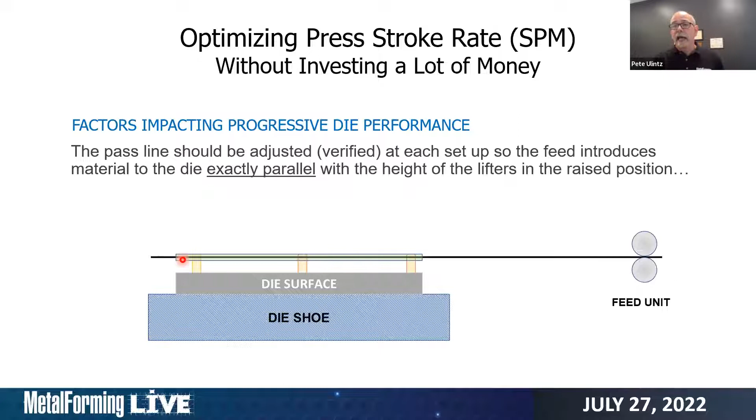In general, I would say that our pass line should be adjusted and verified with each setup so that the feed, the material coming from the feed, introduces the material exactly parallel with the height of the lifters in our die. So if we've got a die that has any lift where we're lifting the strip, I suggest that the raised position of our lifters is what the feed line should be. This makes sense because we want no obstruction in our feed. If we have our feed units set lower, we're feeding uphill and then changing direction to continue feeding into the die. This change in direction is what's going to give us problems.

Now for dies that have little or no lift, such as a lot of high-speed applications, what we would be looking at is we want to make sure the die surface and any feed bridge or extension that we have are all on the same surface. A lot of times in high-speed applications, to set the feed line, what we'll do is we'll actually get in there with an indicator, indicate the die surface, indicate the feed bridge. If there's a feed shelf coming off from the feeder, what is that height?

All of this should all be in line, because especially for very thin materials running at high speeds, any change of direction is going to pose an opportunity for the material to bend, buckle. We're going to have short feeds, missed feeds, things of that nature. So in my opinion, this is very important.

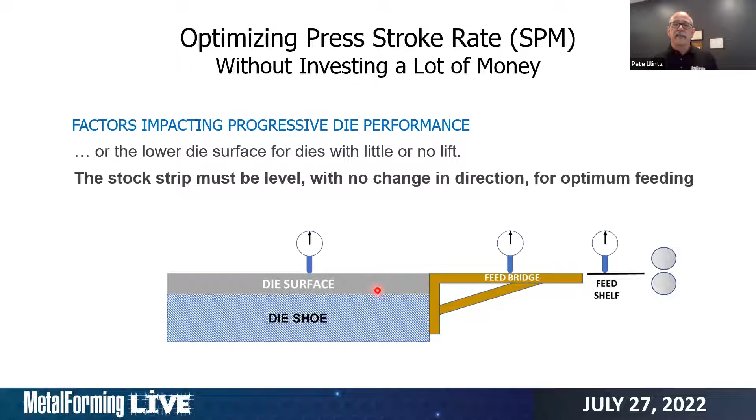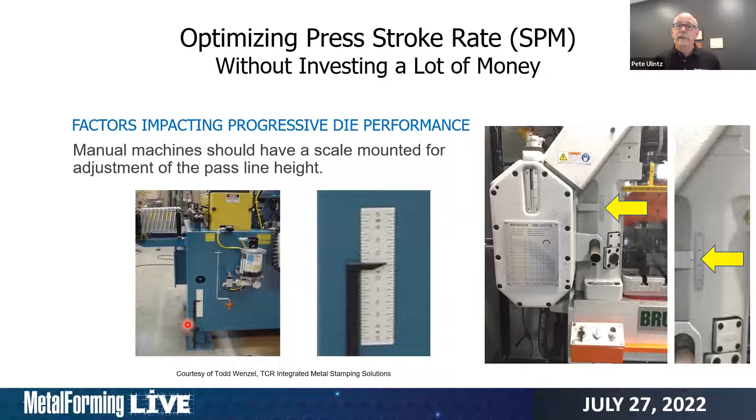Now, this particular customer took a scale, epoxied it to the side of the machine, and made a little pointer. So if the setup required that the feed be raised 10 millimeters or lowered 8 millimeters, they can get an exact measurement off of the scale and have much more accurate settings. On the right here, we see there's a scale mounting. Some of the press manufacturers include that with their press. So we can see how it works in this application with the Bruderer press.

I cannot tell you how many times I've seen stacks of wooden pallets or plastic parts containers turned upside down to support the stock strip. Think about your stamping operation.

You've got a multi-million-dollar press line with a die in there that probably costs more than most of our homes, and we take fifteen dollars worth of pallets and throw it underneath the material to help keep it level in the die. It just doesn't make sense.

So use or make some type of a coil bridge. One of the important things to notice is that these coil bridges generally have rollers on them, so we want to minimize the amount of friction, because when we're feeding, friction is going to be our enemy essentially.

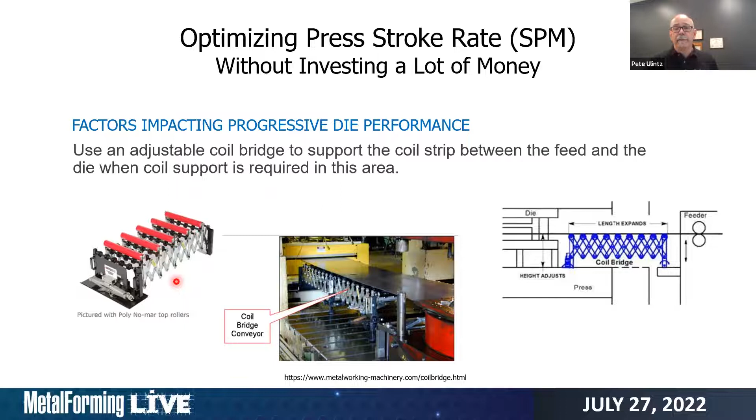Right, we want a smooth feeding without any resistance. So if we're feeding across wooden pallets or other types of containers turned upside down, that's one of our variables that we can't control. What is the friction there? Is that causing our feed rolls to slip? Is it causing a late signal for the material to reach the end of the die, for the signal to go to the press controller to say whether or not the feed made its pitch before cycling through the next operation? Very important.

The other thing that's important is the feed angle. So when we talk about feed angle, what is it? In a nutshell, it's the amount of time we have to feed the material from the time the press opened, the die opened, the pilots have pulled out of the strip, parts have fallen out of the die, they're clear, cams are back. This is what we refer to as a clear path.

Sometimes mistakes are made. We're looking just when the pilot disengages to begin our feed, but we also have to consider are our cams back, have parts ejected properly. This clear path may entail more than making sure the pilots are out of the strip. And then we want to feed the material.

On older feeds, back in the day, typically we fed from 270 degrees to 90 degrees. It was relatively fixed; there wasn't much we could do to alter it. With our mechanical feeds, with the air feeds, we were able to put relays on them, rotary relay switches, and maybe expand the feed angle from maybe 250 degrees to 120 degrees. So we were able to increase this feed angle, which is important.

The larger this feed angle is, the more time we have to feed. The more time we have to feed means we can move the material slower to make sure it doesn't slip, that the progressions are accurate.

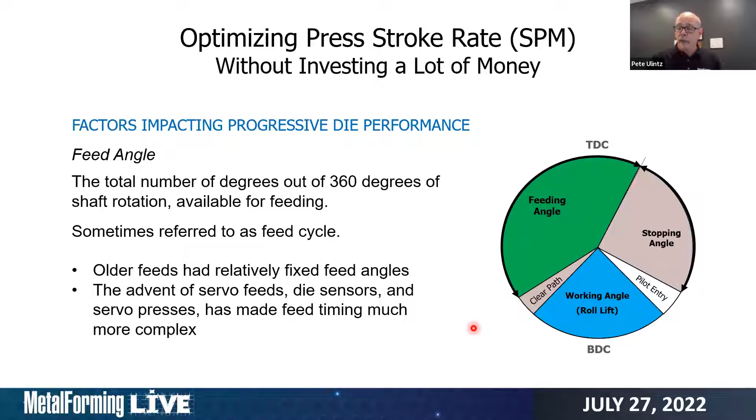And the reason we want to run as slow as possible is, one, it increases accuracy. Two, we reduce the potential for the feed rolls to slip. If we've got some really rapid acceleration, we can get some slippage. We have better loop stability, we don't have the loop dancing around uncontrollably, and that reduces the probability of buckles and die jams.

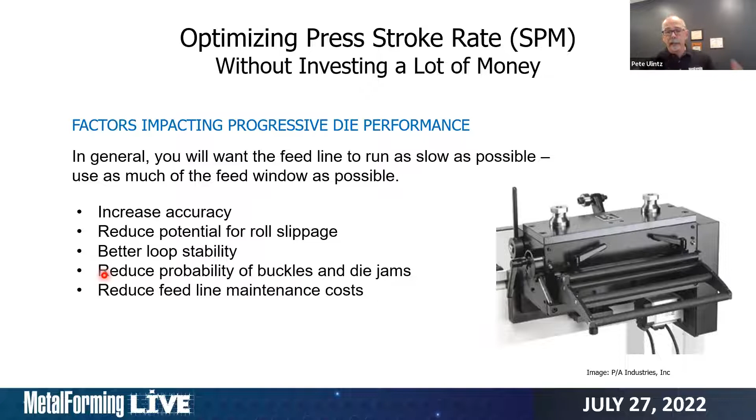And when we slow down our feeds and slow down our processes, it's this right here that we're usually dealing with. We're going to slow things down because we're getting buckles and die jams. And when I say slow things down, we're going to slow the press down, because the press is tied to the feed. If I slow the press down, I slow down the feed, and these problems go away.

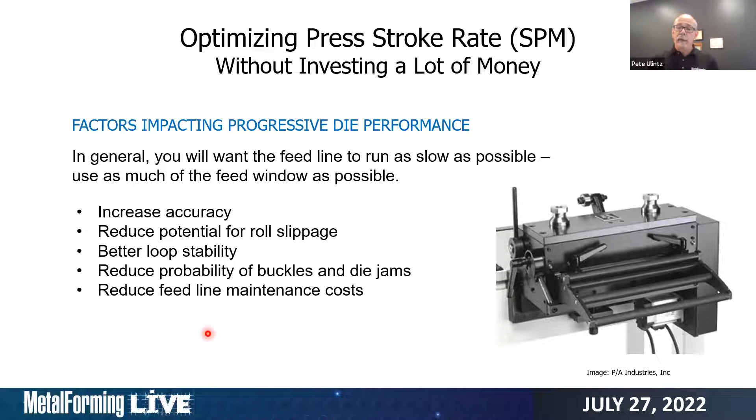But what I'm suggesting is we need a way to maintain press speed while still finding a way to reduce the feed speed, and this is what we're going to be talking about here. It also reduces feed line maintenance costs, because we're not rapidly accelerating and decelerating the materials we're trying to feed through the dies.

So coming back to the angles we talked about, when it comes to die protection, one of the things that's really important is this concept of a critical angle. We have to know what the critical angle is for our process.

The critical angle is the last degree of rotation or angle that a fault can be initiated so that the press will stop before it closes on the strip. This is affected by press speed, the slide and die weight, the counterbalance pressure, the condition of the clutch, and where in the stroke the signal is initiated.

In the stroke, our slide velocities are not constant. At 270 and 90 degrees of rotation, our slide velocities are actually at their greatest, moving at their maximum speed. It's going to take longer to stop the press, as opposed to if a signal was stopped near the top of the stroke, where the slide is beginning to come to a stop, so it can change direction and continue to close the die.

So this critical angle, how do we determine this? One way is to inch the press down and observe when the pilot, the tip of the pilot, not the locating body diameter, the tip of the pilot, is in the material. We can open the feed roll, because if the strip were to shift one direction or the other, the tip of the pilot is in there to pick up the hole and help position it.

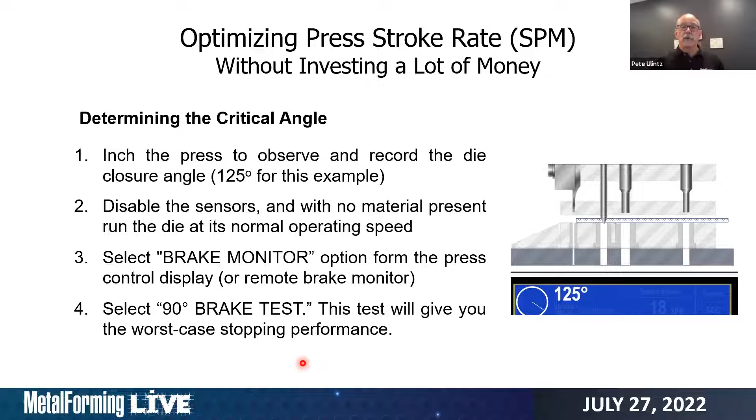Then we're going to select the brake monitor option from your press control, or if you're using a remote brake monitor, you select that option from the remote brake monitor, and you're going to select the 90-degree brake test. The 90-degree test, if we test at 90 degrees, that's the fastest that the slide is moving. That'll give us a worst case stopping performance.

After the press stops, we'll record that angle. In this instance here, we can see the stop angle is 96 degrees. Let's subtract that from the die closure angle, which was 125. The result is 29 degrees. So here's my critical angle, 29 degrees.

This critical angle will change with press speed, because the faster the press is going, the longer it's going to take for the press to stop, for the brake to stop the press. Then we want to document that.

So here is a sensor window setup sheet, and we've got a number of different sensors here. What type of sensor? Is it a top stop? Is it an e-stop? When does it come on? When does it turn off?

It's also important, in my opinion, to create some details or notes. What are you trying to accomplish here? We're in this short feed, we're using a small window to decrease feed-related incidences. On the cam return, we're going to use a small window so the cam does not interfere with the feeding. On material buckle, we'll use the whole sensor window that we have available.

Other related events that I think we should include is, what is the critical angle? And what is the must stop angle for that die? So now we know what the must stop angle is, we know what the critical angle is. How did we determine it? We used a 90-degree brake test. Document that. How did we determine what the must stop angle is? We did it by checking the die closure angle.

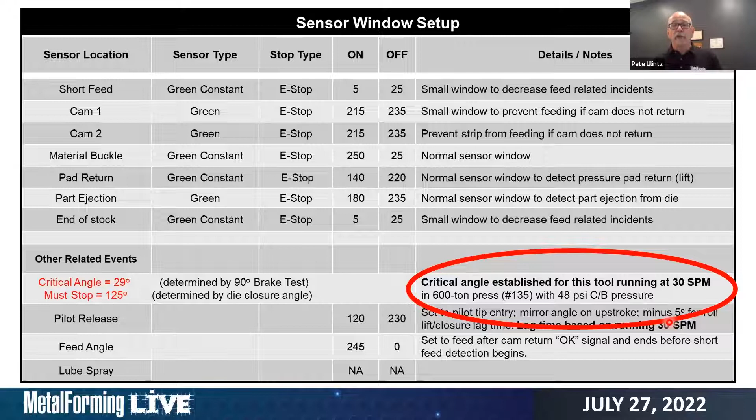Well, all of them are in different states of maintenance. The brake might be worn on one press compared to another that just had a rebuild, so one press has a longer stopping time than the other. Also, what was the counterbalance pressure that was used? Changing the counterbalance pressure will affect the stopping angle.

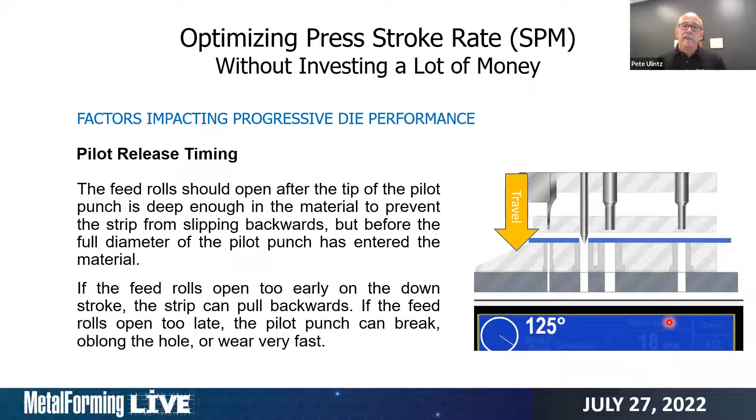What I see a lot of times is, regardless of the die, a lot of press operators and die setters will set the pilot release to close when we're at the bottom of the stroke. The thinking is that I've got the material constrained, the pressure pad and the stripper are holding it, it's been located, it can't move. This is an opportune time to close the feed rolls.

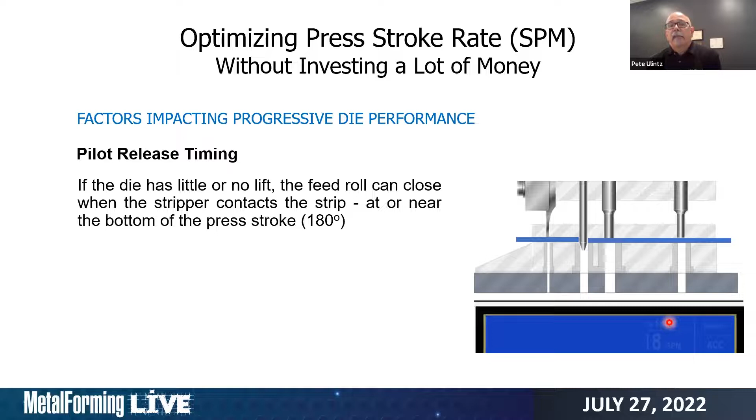But that's a bad decision if the die has some lift. If the die has lift, the feed roll should close when the lifters have come to the full up position, or close them at the last possible minute.

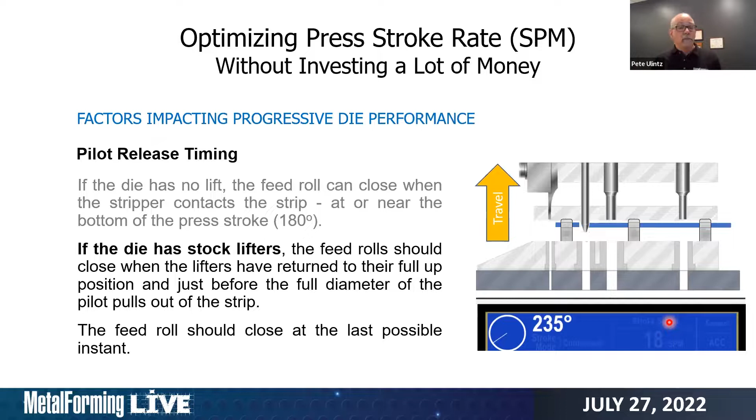Why? Let's look at what happens very quickly here. Here's my feed rolls, I'm feeding into the die. I suggested that we should feed into the die at the level of the raised lifter. So here's what we have: the die closes now, it travels this distance of A. So we're going to say that's 4 inches for this example.

The die closes. The hypotenuse of this triangle, which we can calculate, is going to be longer. We know from our high school geometry, the hypotenuse of a triangle is the longest side. Well, this side got longer because it pulled material from the feed.

If we close at the bottom of the stroke, if I close the feed rolls at the bottom of the stroke, I have this extra material in there. We can calculate this: I'm 36 inches from the feed to the die entry. If I calculate this leg C, it's 36.22. It's almost a quarter inch longer. So when this die raises, I've got a quarter inch too much material in here.

So it may want to buckle or arc a little bit. And as soon as the strippers separate and the pilot comes out, bang, the material moves forward. And what it appears to the operator or the setup person is, I've got a long feed. And they may deal with it by shortening the feed length. So if I have a 12-inch feed, we might reprogram that to be 11 and 3/4 inch. And that is the wrong approach.

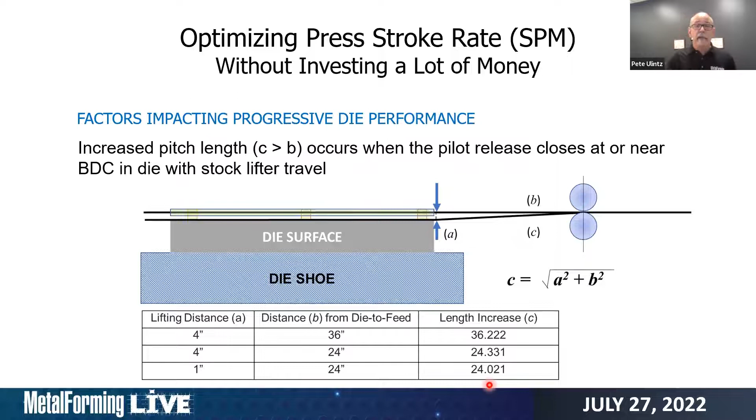And then if I have a die that has a shorter lift, this illustrates why dies with no lift or very little lift can have the pilot release timing set anywhere in the stroke, even at the bottom of the stroke. If I have a 1-inch lift and I close at the bottom at this 24-inch distance, I might be off 20 thousandths of an inch. My piloting, depending on the thickness of material and the types of piloting I have in the die, may be able to correct for that. But when I get into high lifts like this, our piloting is not going to be able to correct for an error like that. So that's one area to look at, and then document it, okay?

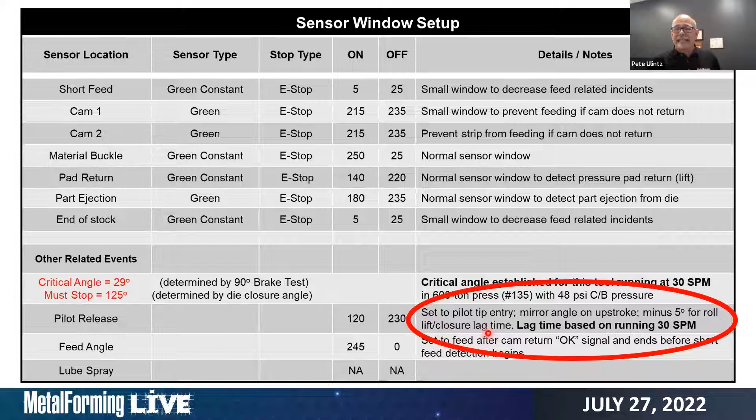How was the pilot release set? Tip entry, we mirrored the angle on the upstroke. We took off 5 degrees for the lift and closure due to lag time. And our lag time is based on running 30 strokes per minute.

We haven't talked about lag time. What is lag time? In my opinion, this is one reason that setting pilot release timing is so complicated.

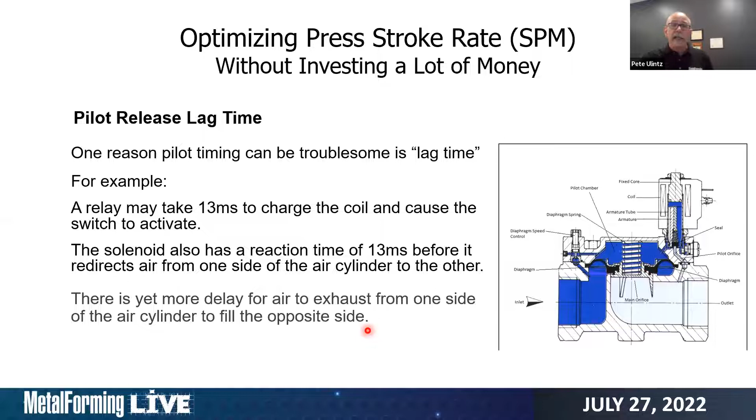We have relays, air cylinders, an air cylinder that's going to lift the feed roll. We have to send a signal to charge a coil to activate a switch - that might take 13 milliseconds. The solenoid might take another 13 milliseconds before it redirects air from one side to the other. Then we need more time to exhaust the air from one side of the cylinder to fill the opposite side, so that can be anywhere between 35 to 45 milliseconds. Most feed manufacturers I've talked to say they believe the lag time is somewhere around 35 milliseconds.

If you're not maintaining your air cylinder on your feed, it leaks a little bit, and the reaction time could take a little bit longer - maybe it's 45 milliseconds. How could that be important in our operations? I mean, a blink of an eye is like 200 milliseconds. How can this be important?

Well, let's look. At 60 strokes per minute, our process is going through 1 stroke every second, and 1 stroke is 360 degrees. A second is 1,000 milliseconds. So if we divide that 1,000 milliseconds by 360 degrees, that means for every 2.8 milliseconds, the press rotates 1 degree. So let's look at the example: we're running 60 strokes per minute, that's 2.8 milliseconds per degree.

I got a 35 millisecond delay, that's roughly 13 degrees. If I got a longer signal delay, it's roughly 16 degrees. Why is that important? Well, if you program the roll to lift at 125 degrees, it may not actually lift until 138 or 141. And we're going to have the same lag time when the rolls close.

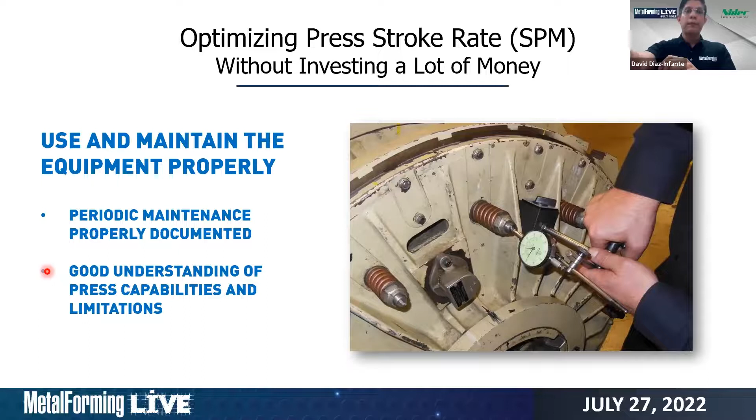Now designing and maintaining the tools according to the process. Again, if you are not selecting the proper coating, if you are having galling issues, if you are not selecting the proper tool steel or the proper hardness in that tool steel, then you are going to stop your press a lot of times and you are going to spend a lot of money during the maintenance. If you don't have the proper cushion systems, especially now with servo presses that everybody likes to run them fast, of course, it's money right there.

So on the way up in a servo press motion, we just worry about the coming down sometimes, downstroke motion, and we slow down. A lot of people just slow down during that portion of the stroke. But then on the way up, we don't slow down, we go as fast as possible. And sometimes we damage the cushion, the nitrogen cylinders. So we have to pay attention as well to what type of cylinders do we have. And there are already in the market, I've heard some cushions that can delay the upstroke so that they can have a softer functioning. Okay, and especially we know the cushion or the nitrogen cylinders themselves are not the biggest expense.

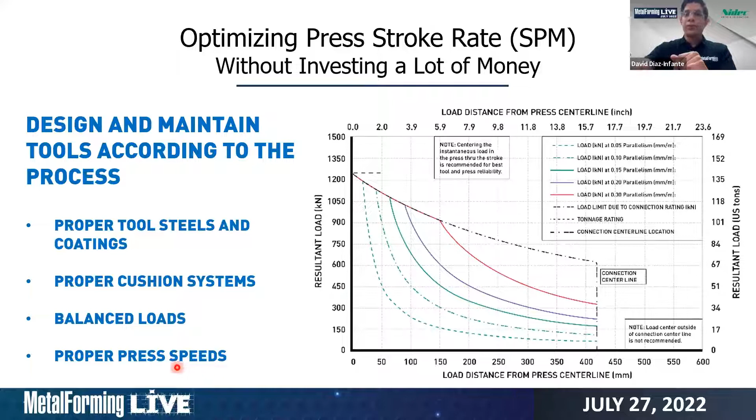So we talked about the impact of having one more stroke per minute, which is a lot. One stroke per minute really is a lot. Now, what's the impact of the opposite? What's the impact of downtime?

Let's assume you're in the 60-minute die change range. Ideally it should take less than 20 minutes, but let's say it takes 60, or for some people even half a day. So for now, 60 minutes, and let's say you change 2 times per day. Maybe you change less, maybe more, depending on the type of shop you're running. So 2 times a day, 5 days a week, 52 weeks per year, that's about 30,000 minutes used for die change.

If we're producing parts, being conservative, let's say 15 strokes per minute, that's already almost 500,000 parts per year. Now multiply that by the cost of the part and the number of presses. Again, same as the one-more-stroke-per-minute example, this is 1 minute you could use to produce parts instead. It's 60 parts per minute versus 15 parts per minute. So we need to decrease our downtime a lot.

So there are ways to do it. The first one, without spending a lot of money, is the important part: we need to have consistent processes, as consistent as possible. And I know it's difficult — there are a lot of variables we cannot control.

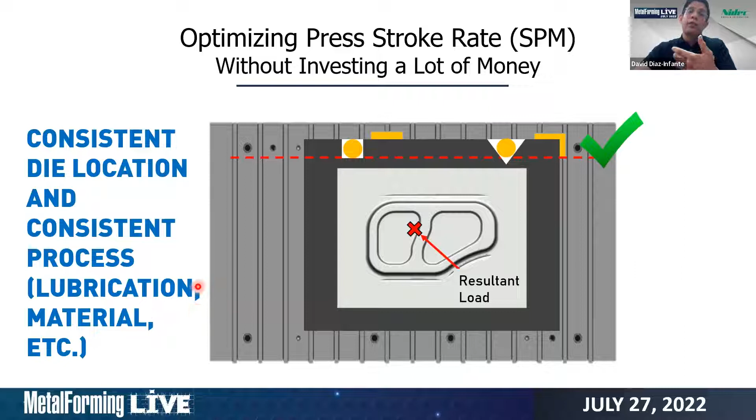Of course, there are going to be issues — we're not going to be there the whole day to make sure everything is being done right. So there are ways to do it, including automated ways.

We also need to pay attention to the way we design the tool. Most of the time we design it with the process in mind — we're deforming the material, we don't want fractures, we don't want wrinkles. But we also need to pay attention to how we're going to mount the tool inside the press, or install it.

But instead, if you design your tool with plates instead of just parallels like this, you can slide your die on the die lifters. That makes the setup process much easier and faster, with less damage to the press or bolster surface. Also, having these plates allows you to put locators like the ones I showed, which otherwise you'd have to weld onto the parallels — making it harder to keep consistency in your tools.

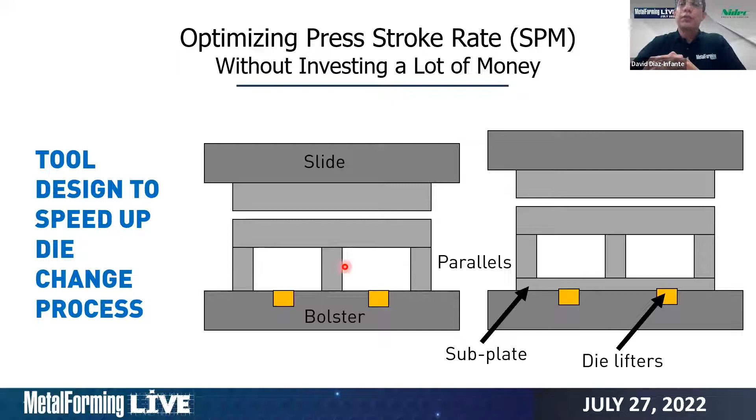Those two things I mentioned are fairly cheap, or at least within the lowest range of expense. But now, if you do the math and find you're wasting a lot of money due to downtime from tooling setup — taking so long to change tools — why not invest in a quick die change system? You could have moving bolsters, a cradle to stage the next coil before the first one is used up, or hydraulic clampers to install your tools much faster. Here we don't need automatic tools because we have the bolster outside.

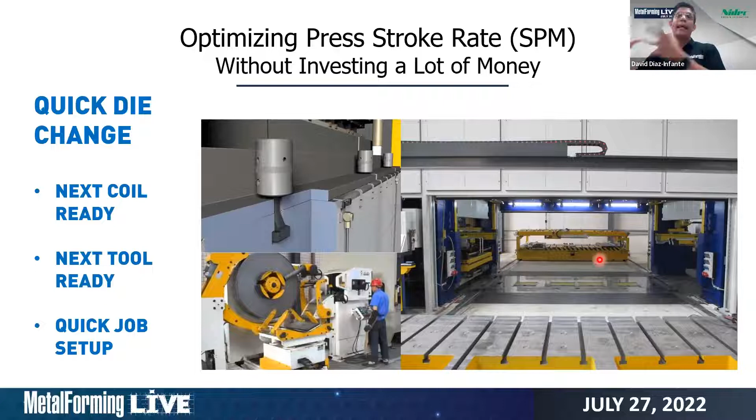We can do it manually while the press is working, but having it set up on the slide is a good option. Now, if you don't want to invest in this type of equipment, you can still have your next coil ready. If it's not sitting on a cradle, at least it can be located very close to the press. You can have the tool ready and close by too, so you don't need to wait until you finish the coil to go get the next tool. Just think about it.

As I said, the energy consumed by the part is what it is. We cannot reduce the energy consumed by the part, but we can manage the energy in the press and the ancillary equipment. This is especially applicable to servo presses, where energy management systems allow us to reduce the size of our transformers and the energy going back from the press to the grid. Remember, a servo press can accelerate and decelerate. When it accelerates, it consumes energy. When it decelerates, it generates energy back to the grid, so we can absorb and store it either in a buffer motor or a capacitor bank.

We can also improve the efficiency factor, or power factor, in our plant. I'm not exactly sure how it works in the US, depending on the area, but there are places where having a low efficiency factor is punished — you have to pay an additional fee to the electricity company. So having this type of system helps you keep your efficiency or power factor close to 100%, or 1.

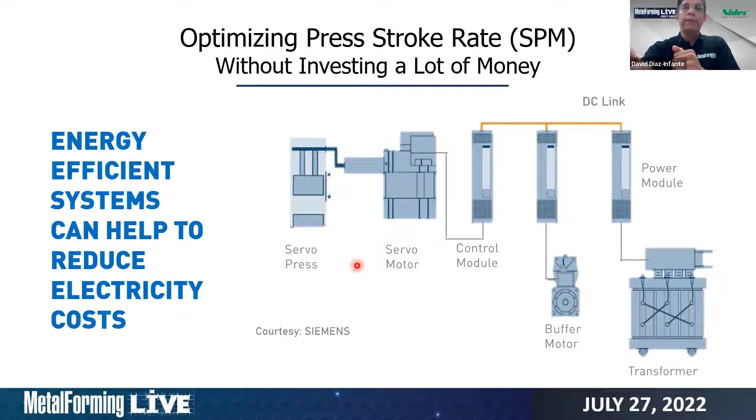Now, I've seen it plenty of times — we're happy, we're stamping, we're producing parts, but there's a point where we have to stop the press again. What's the reason for it? We have to stop because we need to clean all the scrap getting stuck inside the press, or we're pushing scrap using shakers but have scrap bins next to the press that need to be emptied and replaced. That takes time — 5 or 10 minutes — but if you're producing 15 parts per minute, that's already 150 parts every time you do that. Do it 10 times a day, and it's already 1,500 parts right there.

So using scrap conveyors or other systems to evacuate scrap and separate it properly is very valuable as well. It's an investment — I know it's not cheap — but it's worth it. You will recover your money very quickly.

Now, Pete mentioned this concept a little bit, and I'm happy he did, because this is debatable — there are teams on both sides. I'm one of those promoting looking at distance of bottom and not only press angles. It's a bit of a struggle, especially with very experienced people who've been in the industry for many years and are very familiar with angles, and want to keep using angles.

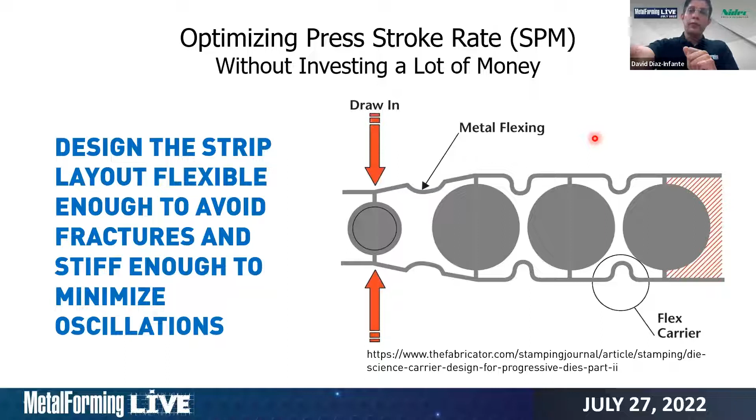Or there's another approach where we have only half of the forming portion at 10 strokes per minute. Obviously, this is going to go faster, but now you are going to be suffering a lot of acceleration or damage in your equipment. Maybe it's important, maybe it's not.

I was 2 weeks ago in a plant where they were breaking their die lifters because of the speed. Consequently, they were producing 4 parts per minute more, but if they have to stop the press, they have to change die lifters. It's expense for the lifters, it's expense for downtime, it's everything. So you need to evaluate which approach is best for you if you have a servo press.

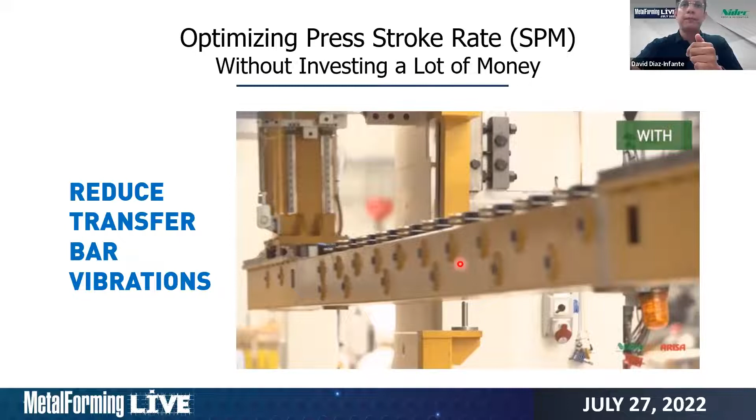Well, if we have an integrated system, that is going to save us a lot of setup time. Sometimes the whole system doesn't talk to each other, each component doesn't talk to each other very well. And if we make a change in the program, we have to go backwards to make the adequate changes to the rest of the program. If we have an integrated system, making a change on the press, for example, is going to send instructions to the rest of the devices to make sure everything is running smooth again, in a very quick manner.

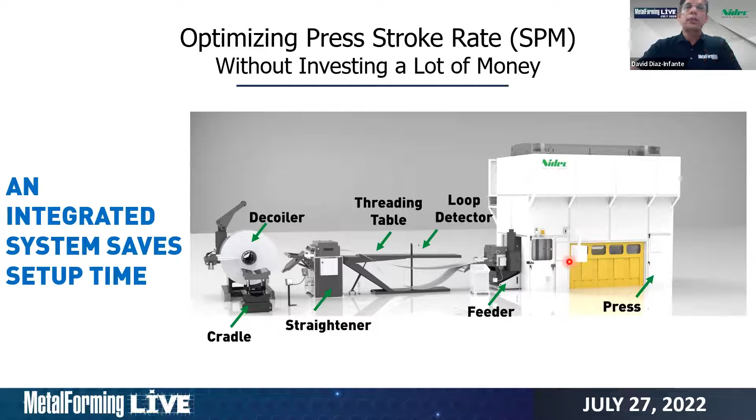I've been involved in the two approaches where we need to make a change on the press and then we need to make a change everywhere else. It's kind of painful and takes time. And I've been in situations where we just make the change in the press and we just press the button again and everything runs well again.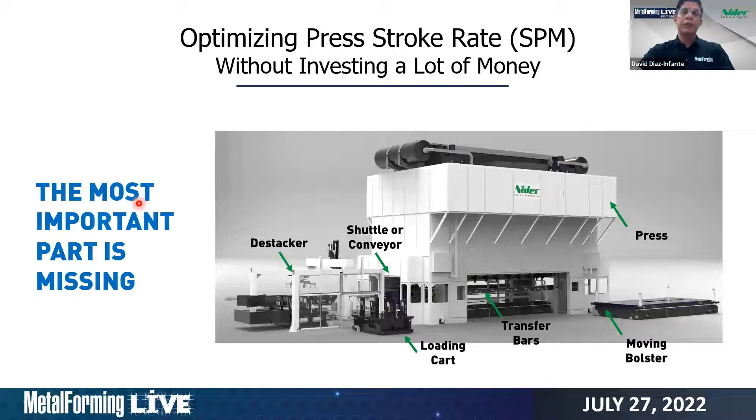And here I'm showing just another system, but the most important part in this presentation is still missing. And I guess you already know which is the most important part, and that's the human factor. We can have the best of everything, but we need to know what we can do with our human resources. And sometimes the bottleneck is just right there. Okay, thank you very much.